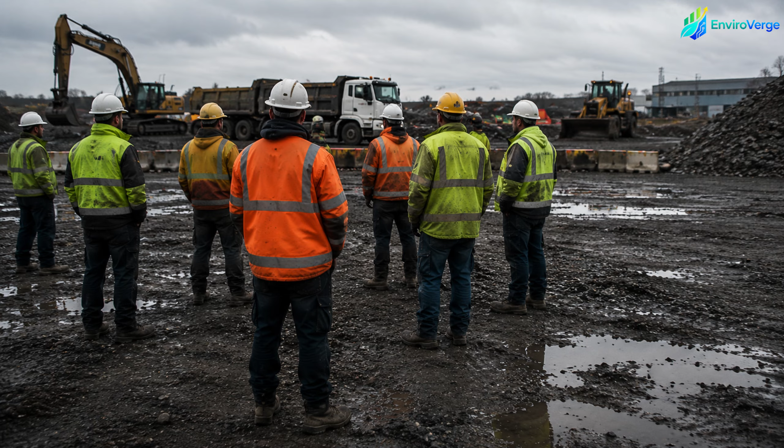Here's what an uncontrolled site incident actually costs, and I'm not talking about the cleanup bill. An uncontrolled spill reaches drainage within minutes. Soil contamination, groundwater contamination. That's not a theory. That's a timer starting the moment it hits the ground. Regulatory shutdowns, days, sometimes weeks. Equipment idle, crew idle, schedule blown.

Then come the fines. Remediation costs stacked on top of regulatory fines, stacked on top of reputation damage that follows your company into the next tender. And in the worst cases, one poorly handled incident can cancel your environmental permits entirely. That's not a fine. That's a project end.

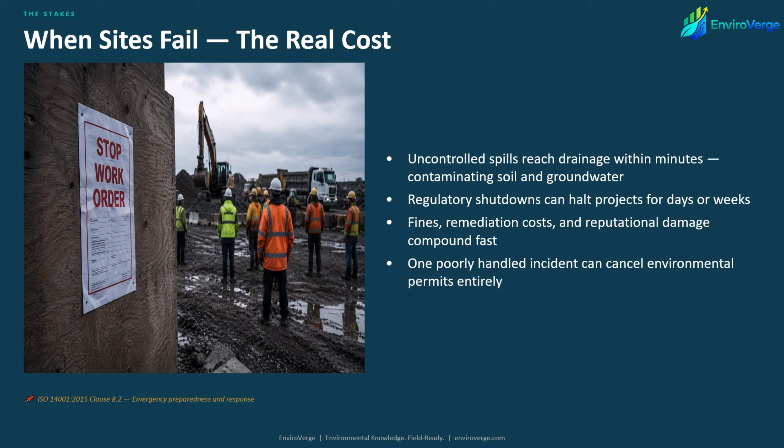So, what actually qualifies as an environmental emergency on a construction site? The obvious one, an uncontrolled release. Fuel, chemicals, hazardous materials, anything that leaves its containment boundary without your control, that's an emergency. Not a spill, an emergency. Less obvious, a sudden dust or noise event that breaches your permit thresholds. If your monitoring data spikes past the limit, you have a regulatory trigger. That counts.

Concrete washout overflow reaching any watercourse or drainage channel. We'll come back to that one. And extreme weather events, wildfire, flood, significant rainfall. Anything that creates uncontrolled runoff or mobilizes site contaminants. Your site doesn't have to cause the weather. It has to respond to it.

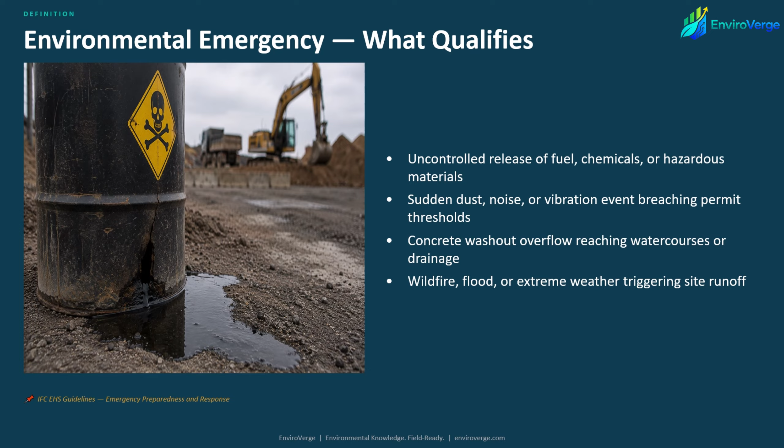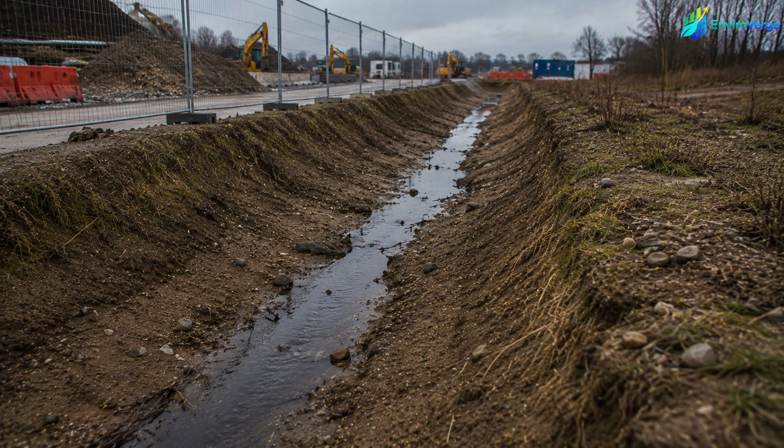Here's how this plays out on a real site. 6 a.m. An equipment operator walks his pre-start inspection at the refueling station, and there it is, pooling diesel on the ground, approximately 200 liters, already moving toward the unlined drainage channel 80 meters away. He looks for the spill kit. It's not there. The nearest bunded area? 80 meters in the other direction.

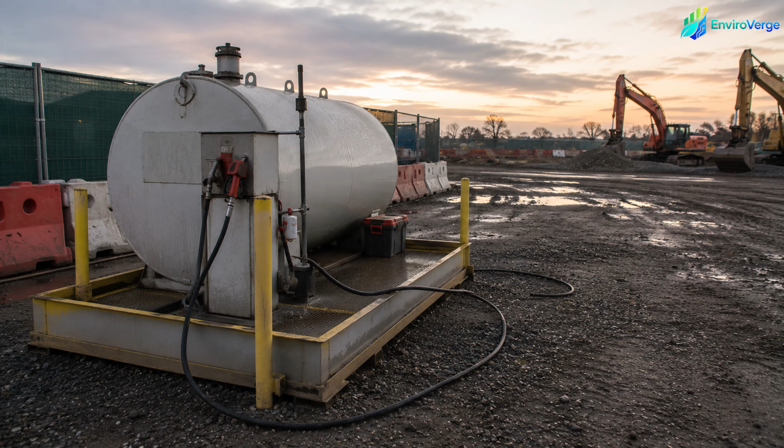He calls the site environmental officer. Off-site. The secondary contact? Unaware this scenario even existed in the ERP. This is the moment. Everything that happens next depends on what your team trained for, or didn't.

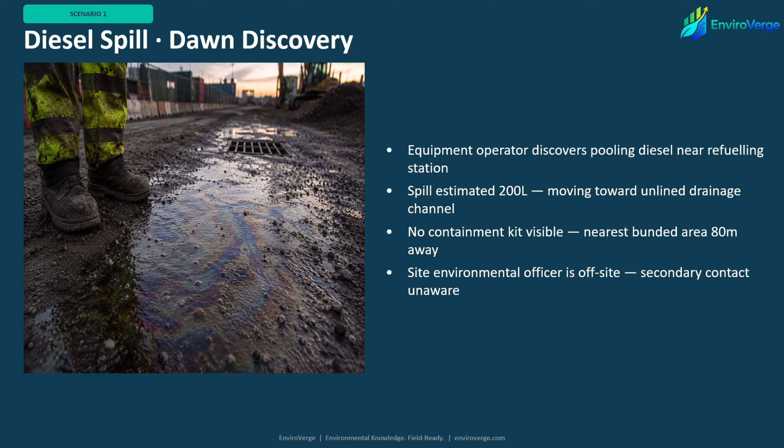5 minutes. That's what you have before a 200-liter diesel spill reaches an unlined drainage channel. Step 1. Stop the source. Isolate that fuel valve. Right the drum. Get to the cause and shut it down. If you can't stop it, contain the flow direction.

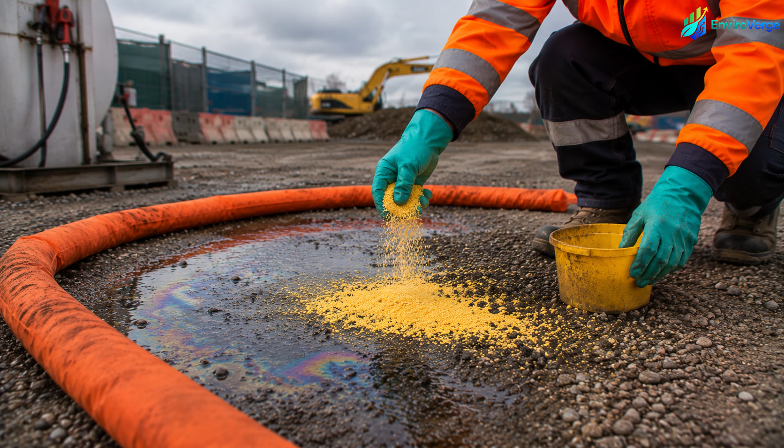Step 2. Contain the spread. Your spill kit should be within 30 meters of every fuel storage area. Deploy the absorbent socks. Build the berm. Form a physical barrier between the spill and the drain now.

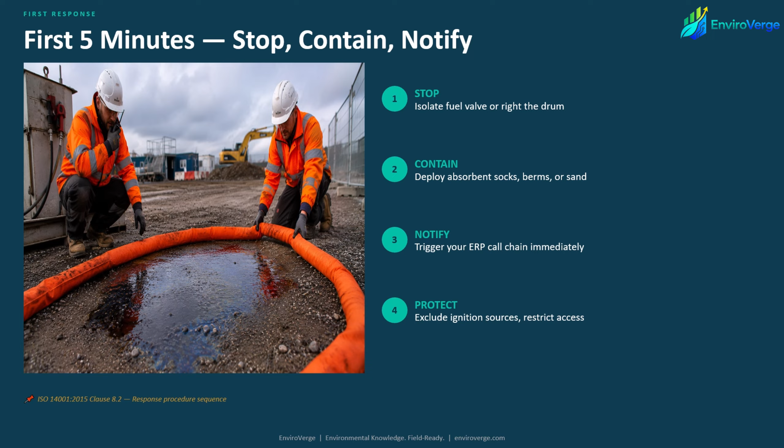Step 3. Notify. Trigger your ERP call chain immediately. Your site environmental officer, your site manager, your client if your plan requires it. The call chain exists so you don't have to think under pressure. You just follow it. Step 4. Protect. Exclude ignition sources from that zone. Restrict access. No one enters that spill area without the right PPE and a role in the response.

This is what a properly executed response looks like on the ground. Boom ring in place. Exclusion zone established. Response team on site within 4 minutes. That doesn't happen by accident. That's a trained team with a plan they've actually practiced.

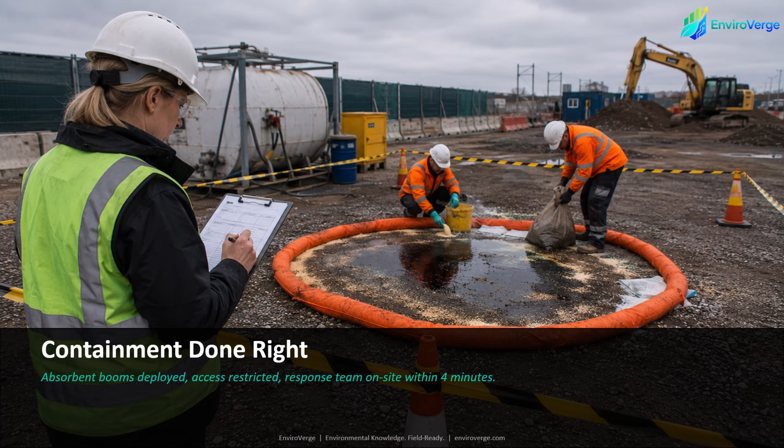Scenario 2, and this one is more common than the fuel spill. A concrete washout pit. Standard site infrastructure. Then an unexpected rainfall event, heavier than forecast, and the pit overflows. Gray alkaline slurry, pH well above permit limits, running off the bund wall and pooling on bare earth. No secondary containment. The overflow reaches an unlined channel 30 meters from the site boundary.

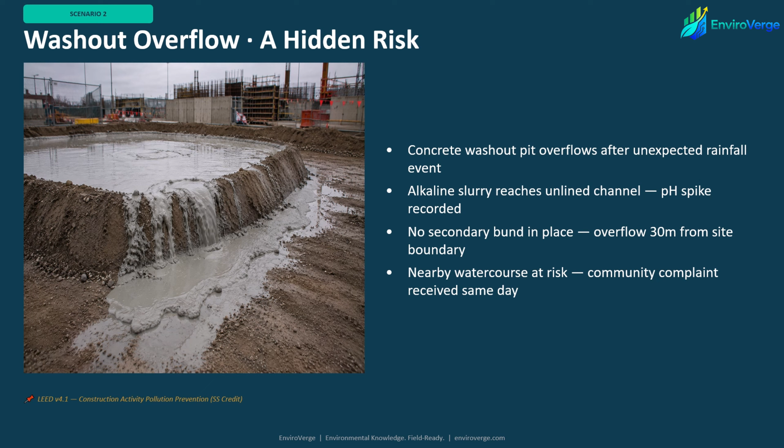And then, the watercourse is at risk, which is when the community complaint arrives. Same day. That sequence, from overflow to complaint, can happen in under an hour. And without a specific emergency response procedure for washout events, your team is improvising. Under pressure. On the record.

Scenario 3. This one changes on you fast. A forklift clips an unsecured chemical drum in the storage area. The drum breaches on impact, liquid pooling immediately. First problem, the label is damaged. Nobody can read it. And the SDS, the safety data sheet that tells you exactly what you're dealing with, not accessible at the point of spill. Workers are evacuated, but no air monitoring is triggered because the procedure doesn't specify the trigger for this scenario type.

And then, the wind shifts. The residential area is downwind. You have an unknown chemical, an unquantified release, no air data, and a community at potential risk. That is a multi-agency environmental emergency. And it started with a forklift traveling too close to an unsecured drum.

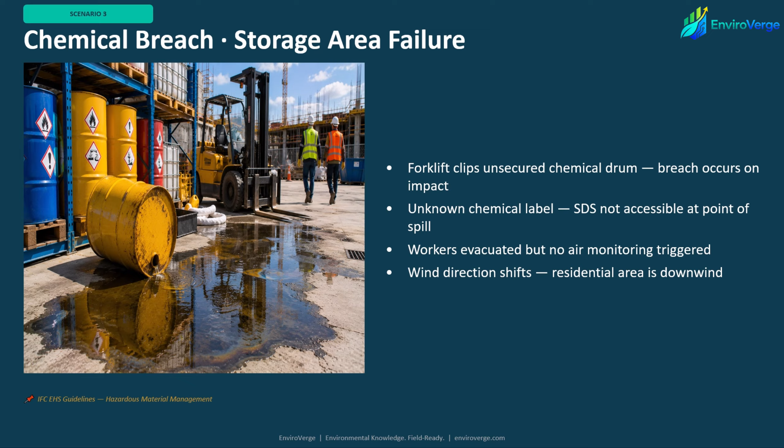So, what does a functional emergency response plan actually need? 5 elements. Non-negotiable. 1. Trigger criteria. Not generic language. Specific, site-specific definitions of what constitutes an emergency on your project. What volume, what substance, what threshold triggers the plan. 2. A call chain. Not a list of names in a drawer. A live, tested, numbered sequence. Primary contacts, backup contacts, client notification requirements.

3. Response procedures. Per emergency type. The fuel spill procedure is not the chemical breach procedure. They're different. Your plan has to reflect that. 4. Resources. Where is the spill kit? How many units? What access route? Can your team answer that at 6 a.m. without looking it up? And 5. Regulatory notification. Who do you call? In what time frame? With what information? This one trips up even experienced teams.

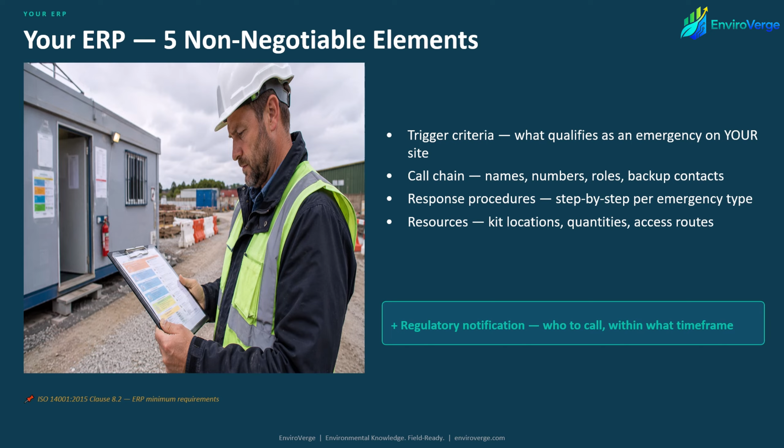The incident has happened. You've contained it. Good. Now, the clock is ticking on something most site teams miss. In most jurisdictions and across project requirements, you have a mandatory notification window. 1 hour, 2 hours, 4 hours, depending on the incident type and your contract requirements. Miss that window, and you've just committed a separate regulatory offense. Not the spill, the failure to notify. Those are 2 different liabilities on 2 different timelines.

Document everything in real time. Time of discovery, time of your first call, who you spoke to, what you told them. Don't reconstruct it from memory at 5 p.m. And never, ever assume someone else made the notification call. Confirm it, log it, keep it.

If it isn't written, it didn't happen. Photo, timestamp, log entry. Every response step documented in real time. That record is your protection. From regulatory challenge, from contractual dispute, from the question asked 6 months later. What did you do, and when did you do it?

Your ERP is only as good as the last time someone practiced it. Tabletop drills. Walk your team through the call chain, verbally, before a real emergency forces them through it under pressure. Does your backup contact know they're the backup? Have you asked recently?

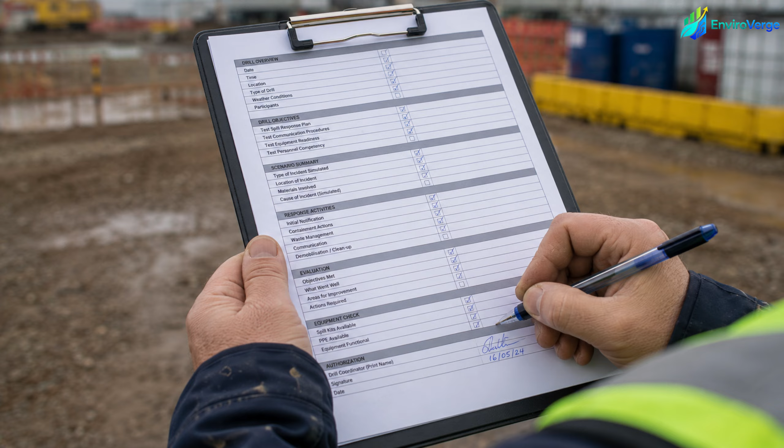Field drills. Physical. Put the team in front of the spill kit and ask them to deploy it. Where is the spill kit? Really? Not on the plan. On the ground. On your site. Today. Post-drill reviews are where the gaps appear. Before an auditor finds them. Before a regulator finds them. Before a real emergency exposes them.

And ISO 14001 Clause 8.2 is clear. The requirement is not to have a plan. The requirement is to test it, review it, and provide documented evidence that you did. Not just the plan, evidence.

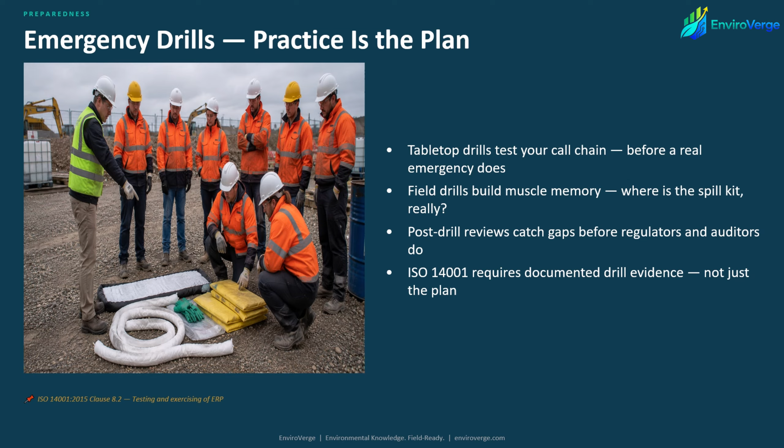Containment is step 1. Root cause investigation is step 2. Don't move on from an incident without understanding how it happened. Not so you can assign blame, so you can fix the condition that made it possible. Document the cause, contributing factors. What was the equipment condition at the time of the incident? What was the procedure that should have prevented it, and why didn't it?

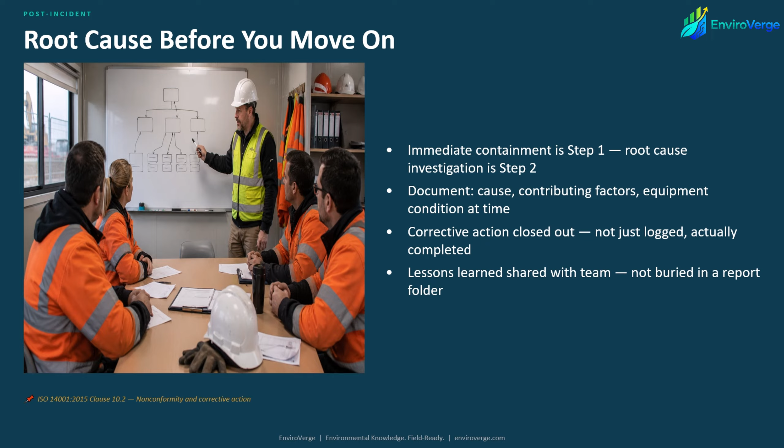Corrective actions need to be closed out. Not logged, not assigned, actually completed, verified, signed off. And lessons learned need to be shared with the team, at a toolbox talk, on the site notice board, in the next environmental induction. Not buried in a report folder that nobody opens until the next audit. That's not lessons learned. That's lessons stored.

Let's connect what we've covered to the formal standards, because this is what gets audited. ISO 14001 Clause 8.2 requires more than a written ERP. It requires that the plan has been tested through drills or exercises, reviewed after incidents, and updated when changes occur on site. The test is required, not optional.

IFC EHS guidelines extend the requirement to community notification. If your incident has a potential impact on surrounding communities, they need to know. That's a formal requirement, not a courtesy. For NEOM and Aramco projects specifically, real-time incident reporting to the client environmental team is a contractual requirement. Not daily, real-time. All of these frameworks have one thing in common. They don't accept intent. They don't accept process. They require evidence.

4 questions. Answer them honestly for your own site. Does your ERP exist, and is it accessible? Not in a folder on a drive. On site, right now, printed, laminated, findable in the dark. If the answer is no, that's your first action. Do all team members know their role? Tested, not assumed. Have they actually run through it? Or do they just know that a plan exists?

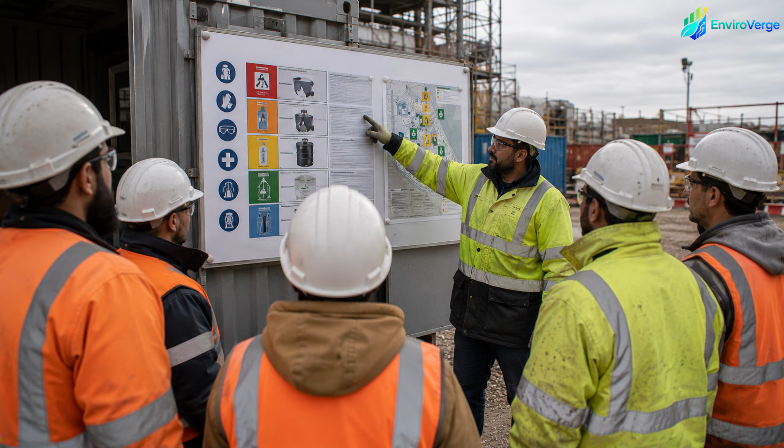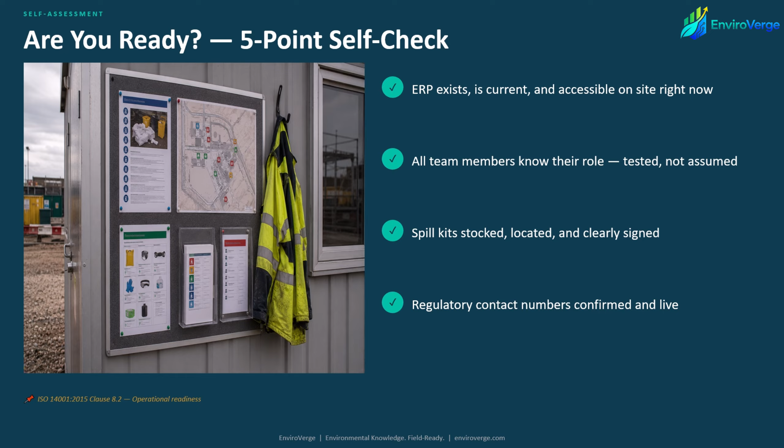Are your spill kits stocked, located, and clearly signed? When did you last physically check the stock level? Not the inspection sheet, the kit itself. And are your regulatory contact numbers confirmed and live? A number from last year's plan that's been disconnected is not a contact number. It's a false sense of security.

Here's the thing about environmental emergency response. Every emergency starts before it happens. It starts in the ERP review meeting that nobody skipped, the drill where the team found the gap, the corrective action that got closed, not just logged. Your ERP is only as good as your last drill. That's the standard, not the document date, not the sign-off, the last time your team actually practiced it.